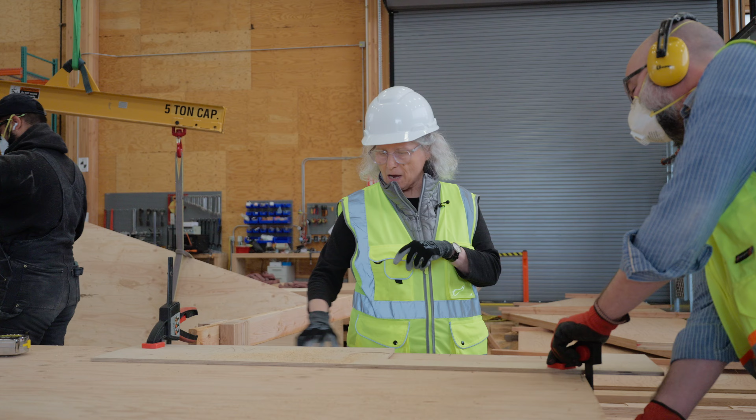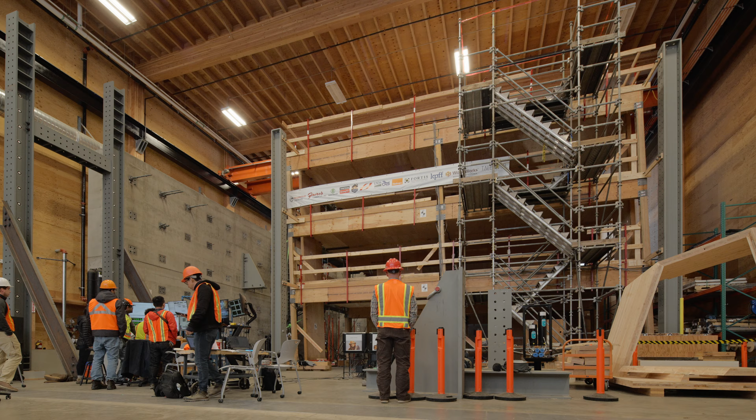We're part of an ecosystem of so many individuals, companies, agencies, and researchers at the University of Oregon and OSU. We have engineers, architects, fabricators who believe in mass timber. We're all trying to get to this mass timber adoption threshold, and it doesn't feel adversarial at all. I think it feels super collaborative. It's like a party where everybody gets to dance with each other.

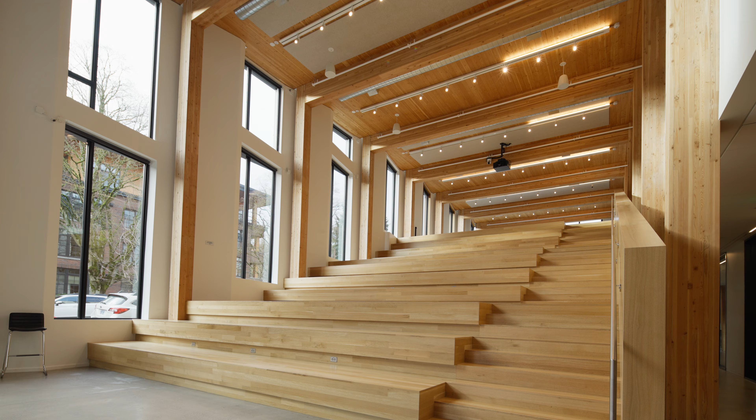But it's like a team. The more you play together, the better you get. We've been able to refine how we do things over multiple projects, and that didn't just happen overnight. It happened because we've been working on these systems for 10 plus years. It's this constant tinkering and learning from one project to another. That's the innovation. This isn't just a project, it's a vision.

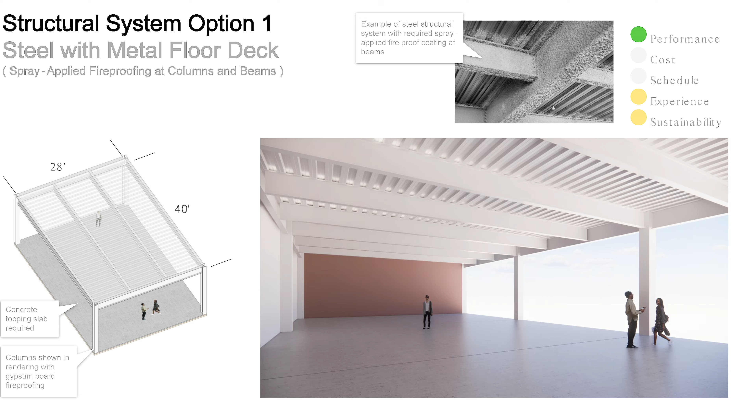The art and design building has been a long time coming. We had the vision that mass timber could work, but it had to work financially, right? We get a certain amount of budget from the state and there isn't any more money. And so if we can't make it work, then mass timber wasn't going to be it.

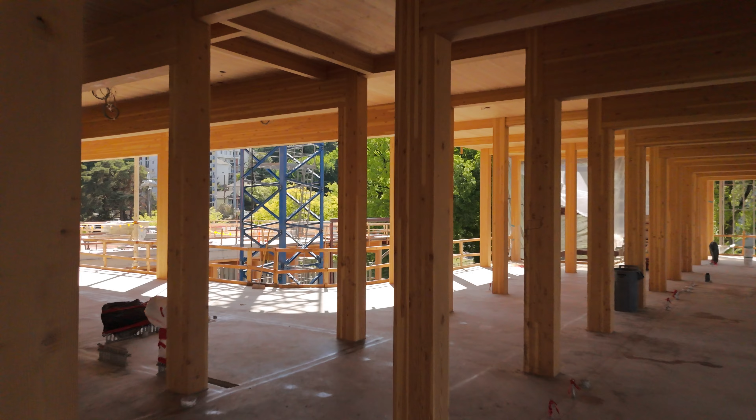So we began touring some of the other projects around town to see how efficient we could become with the timber, and what schedule efficiencies we were going to get so we can have the savings on the back end. We really worked on optimizing how far can we span with a 3-ply panel, which is the thinnest CLT panel, and then using that sort of module for everything.

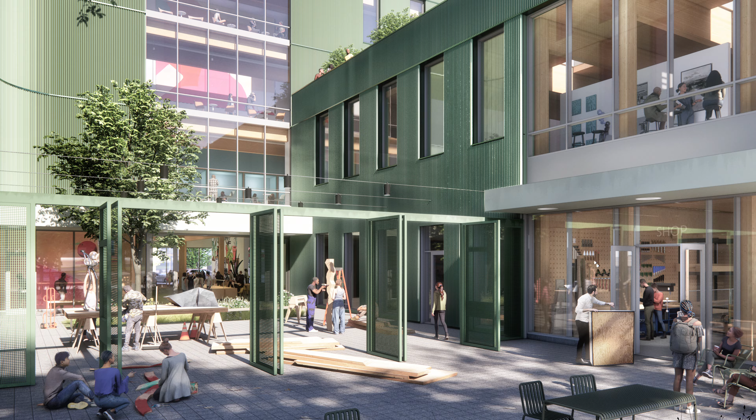We start to understand, okay, here's the grid, here's the layout, this is where we're gonna put all the wood structures. The basic DNA of how that structure works, it's always the same, it's just rotated. And that was really imperative to bringing this into budget, but also creating the right building for the site. At the end of the day, we were super pleased to be able to make that happen, really because of the creativity of the architecture and the construction team.

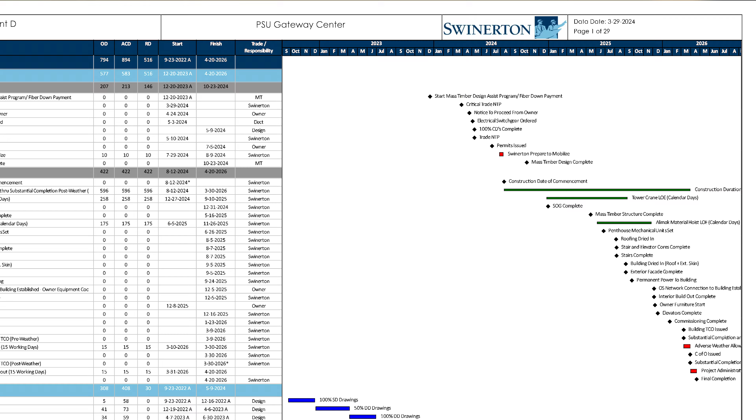It's also gone incredibly quickly in terms of its construction. We were able to do like 27,000 square feet of structure of the timber of the first floor in 10 working days. The schedule benefits of that are significant. It's going to be an incredible building. I think the best art and design building on the West Coast.

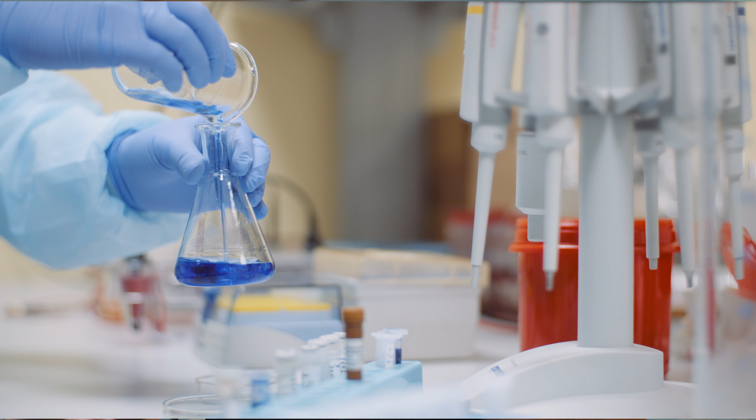Let's create space that we can't replicate anywhere else on our campus. At Oregon State, they're doing this one new building that needs to bring in the supercomputers. They have research labs in chemistry, oceanography. There's a virtual reality lab. There are classrooms for undergrads. Innovation's in the word. We've got to move forward and we've got to try something unique here.

Can you do wood in a wet lab? We went on a tour of comparable facilities in other institutions here on the West Coast. We went as far away as Texas. They all have collaborative innovation centers, and guess what? They're all steel and concrete.

And OSU said, yeah, this is all awesome, but we want to do this in mass timber. And we said yes. Can we do that? Yes, we can. Let's just give it a try.

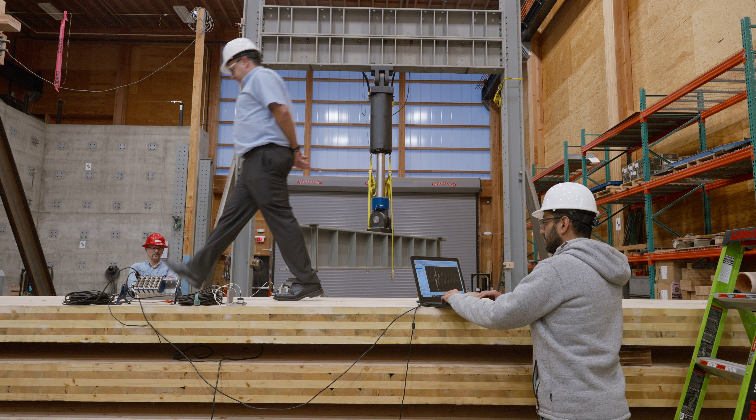The greatest factor that had to be overcome in the mass timber design was the stringent vibration requirements. KPFF structural engineers really came back to us and they proved to us that they could maintain the vibration criteria out of mass timber. This arrangement of framing elements, this geometry, the bay spacing, all these components were engineered for lab performance and organization, immediately followed by vibration control.

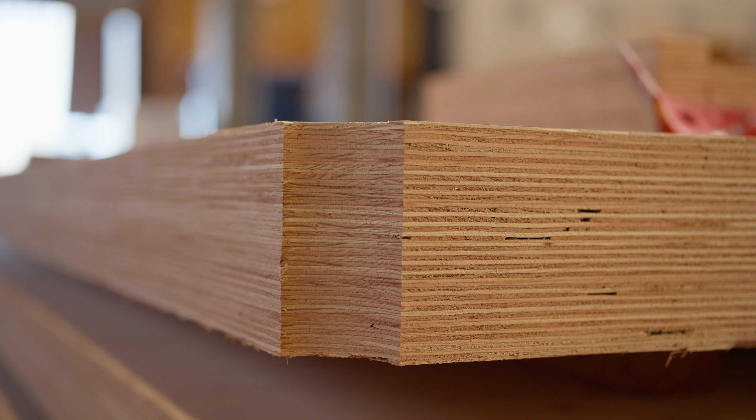Even though everybody was excited about wood, we had to demonstrate that a wood building will cost in line with either building in concrete or steel.

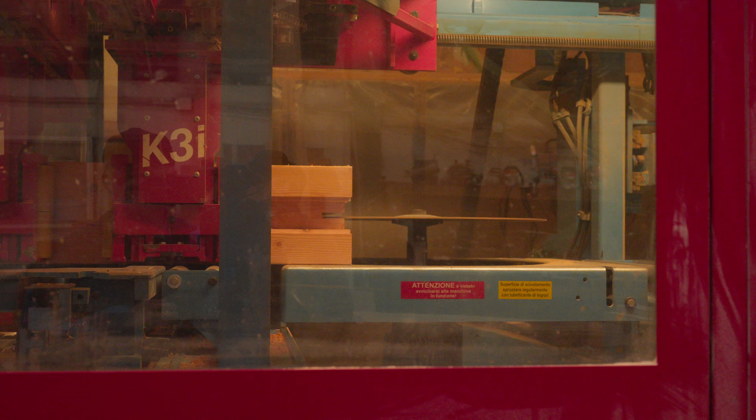So here I am at Cut My Timber, and this is the shop, and this is the machinery where we fabricated all of the MPP beams and columns that make up the primary structure of the HCIC project in Corvallis. People think that mass timber is so much more expensive, and in this case, it really wasn't.

It's going to feel like a real thing. It smells, like you're somewhere rather than nowhere. Yeah, it evokes emotion and warmth, and it's a place you want to be. It's inviting people to experience and stay and learn, and it's obtainable, and it's for everyone.

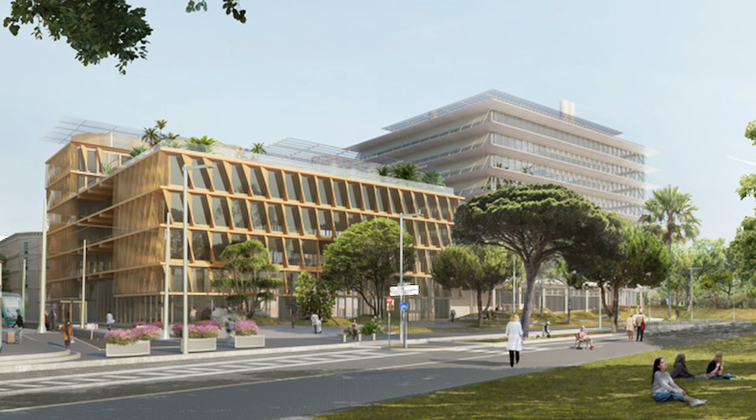As we were working in Oregon State, we won this competition in Barcelona. The original proposal was in concrete, but because of the Oregon State project, because that was a little ahead of time, we went back to the Barcelona client and we said, look guys, we actually think that your building we could do in wood. It's also a research building, has these complicated labs. So we ended up redesigning the structure for the Barcelona building based on the structure we have at Oregon State.

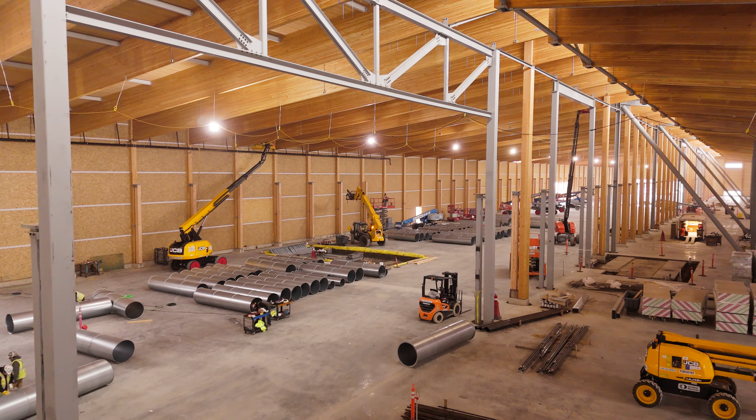Timberlab, 200,000 square foot Indy Hall, which would be probably the most sophisticated CLT manufacturing facility in the United States, just an hour and a half from here, and it's an all timber building. But in my wildest dreams, I could never imagine that we'd have the opportunity to design the space to house the next generation of CLT presses, to build the next generation of CLT buildings across the Northwest and hopefully around the world, sourced from some of the most beautiful and productive forests we have on the planet.